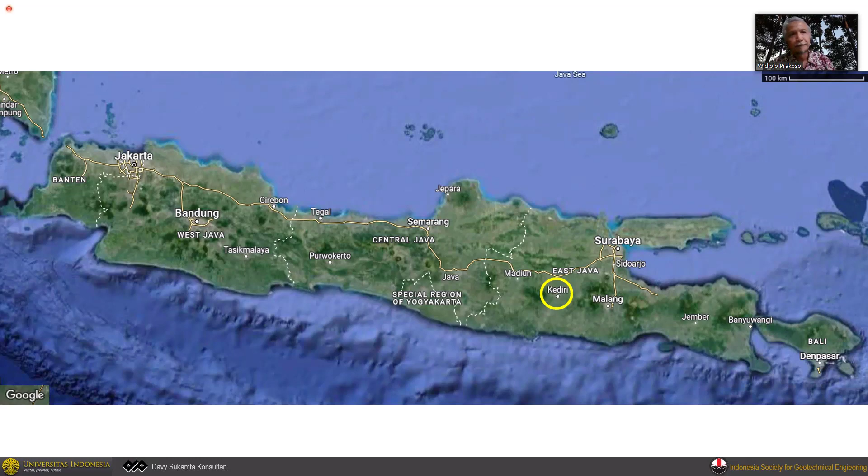On a more detailed map, the location in the yellow circle is northwest of the city of Kediri, on the foot of Mount Liman. Gunung Liman means Mount Liman, and you can imagine what kind of materials are available in that area due to the volcano. Mount Liman is a stratovolcano, and it is considered dormant. Hopefully nothing will happen during the lifetime of the project, so the investor is quite confident about the airport development in that area. When we saw this project for the first time, we knew it was going to be very challenging in terms of the geotechnical variability of the materials.

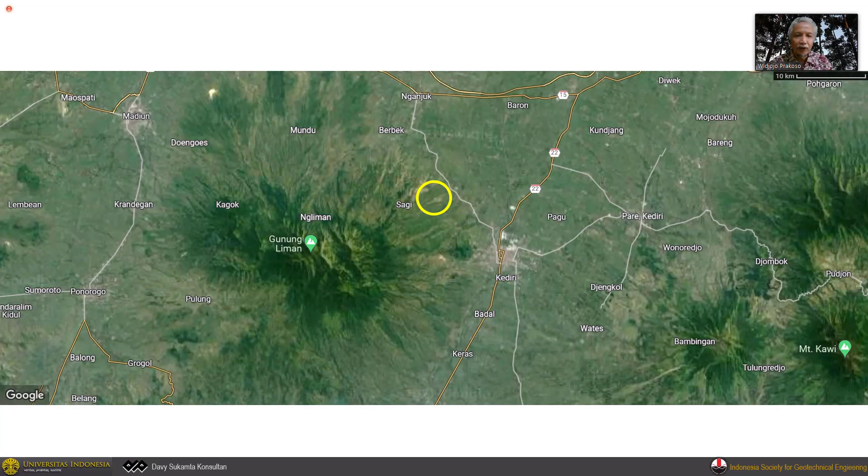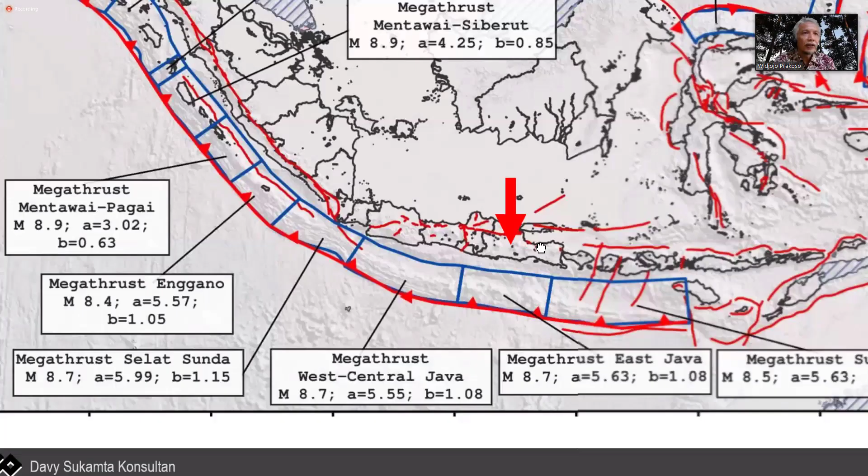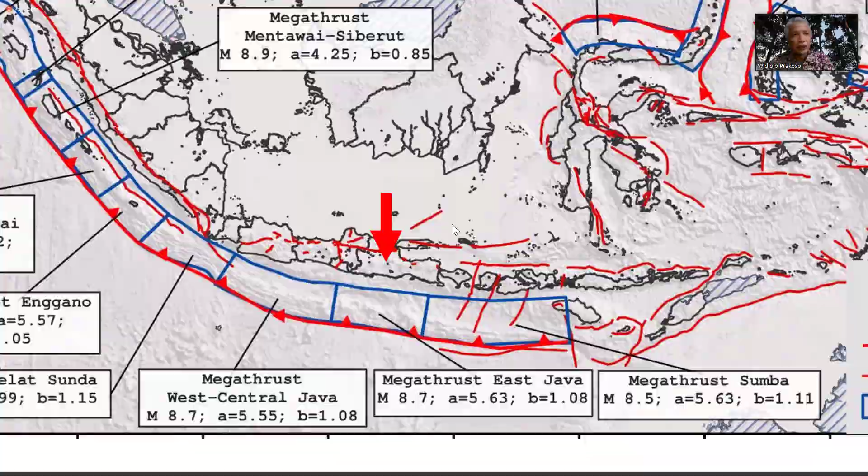Again, the airport is in Kediri; the red arrow shows the location of the project. It is in the southern part of Java Island, not too far from the so-called Java Sumatra megathrust, the major seismic source for Java Island, especially the southern part. So we have to design our airport to anticipate an earthquake from this megathrust. It is an active seismic source, so it is a matter of time before we have a major earthquake there.

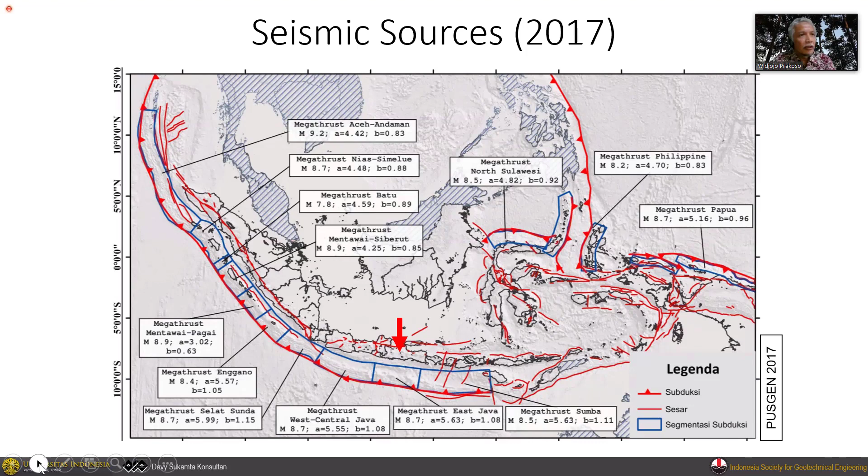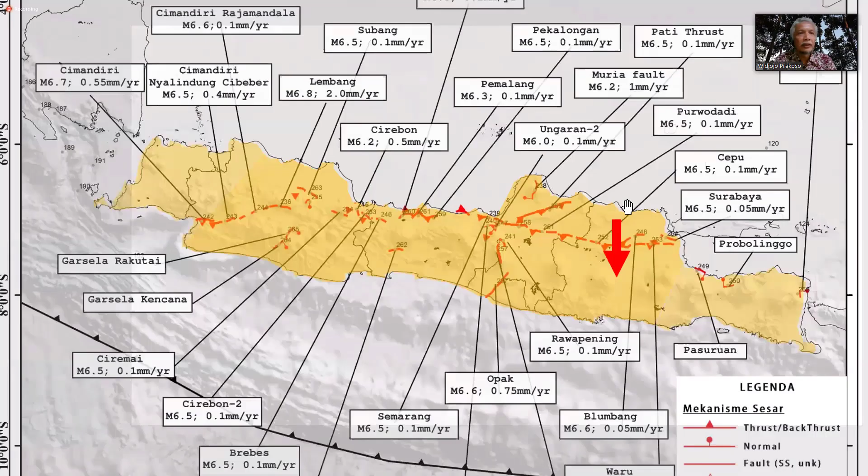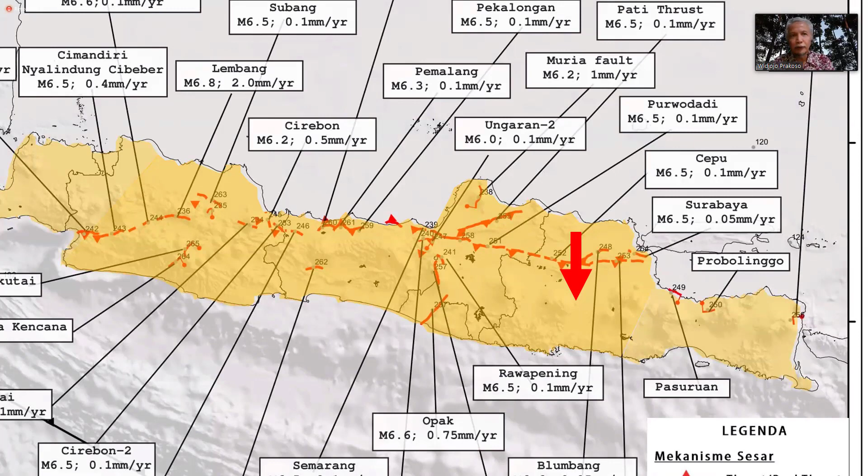We also have a more detailed seismic source map in Indonesia. The red arrow again is the project location. Fortunately we have no direct or near-fault conditions. The nearest fault is probably 50 to 60 kilometers to the north, so no direct interaction with active faults in the region. But overall, we need to consider all these seismic sources in the design.

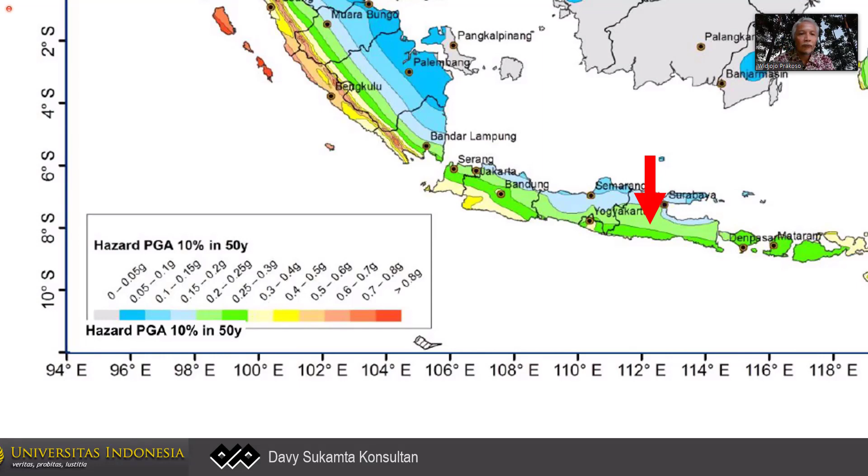Looking at the seismic peak ground acceleration map, our geotechnical codes require designing geotechnical structures to a PGA for 10% probability of exceedance in 50 years, about a 475-year return period, so we adopted this value. In this area the PGA at bedrock level is between 0.2 and 0.25 g, quite large for geotechnical structures, and that affected our design. This is the seismic background we needed to consider very carefully, to make sure the project will survive real major earthquakes in the future.

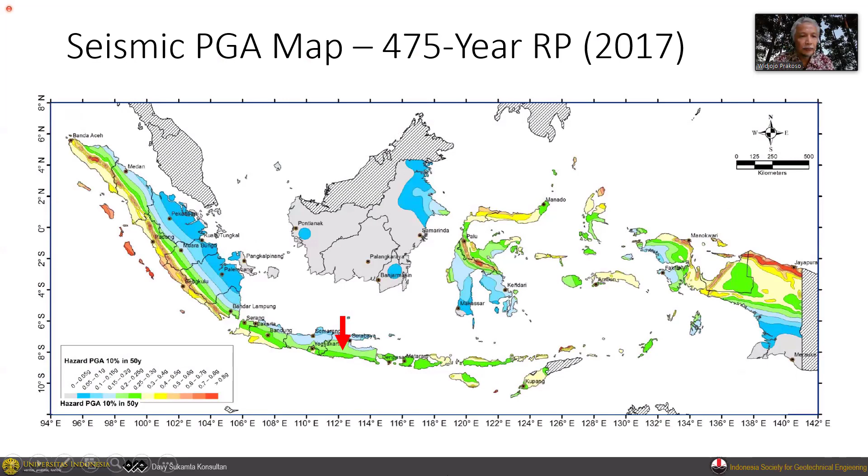And as it is located on the foot of Mount Liman, we also check the geological map, and there is a susceptibility to landslide map developed by the Agency for Geology. And if we look at this map, we found that fortunately it is not within the high susceptibility to landslide. It is in between the very low zone and the low zone. So hopefully, based on the experience of the Agency for Geology, we will not have any major landslide issues in the future.

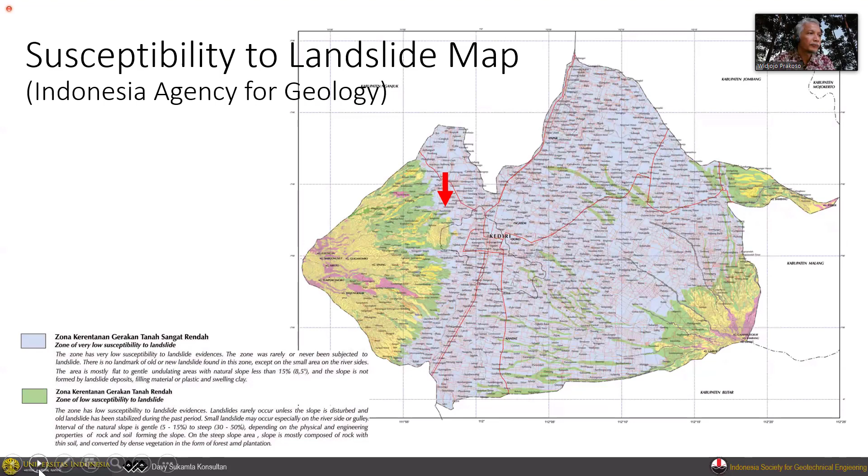So then we look at the topographical map very carefully, because you could see directly that the topography is very complex. If you could imagine, on the foot of a mountain there will be some fingering of the flowing materials, and this is what we are having in this project, a lot of fingerings that we need to take care of. And if you look at the values of the contour lines, you could see 100 to 125 or even 150 meter elevations within a very short distance.

And this really provided us with major challenges regarding how we could have a relatively flat infrastructure in this kind of terrain. So starting from the beginning, we paid a lot of attention to this terrain to make sure that we don't miss any major issues regarding this terrain. And this is another big challenge that we need to take care of.

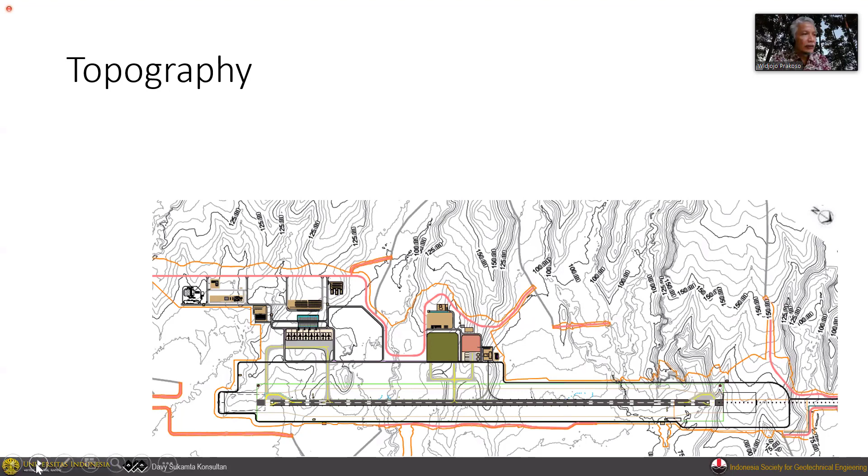So the Agency for River Management told us exactly what to do with this, and we cannot argue with them because that's their authority. So we had to follow their directions to make sure that these creeks are manageable in the future, although we are going to put a major infrastructure in this area.

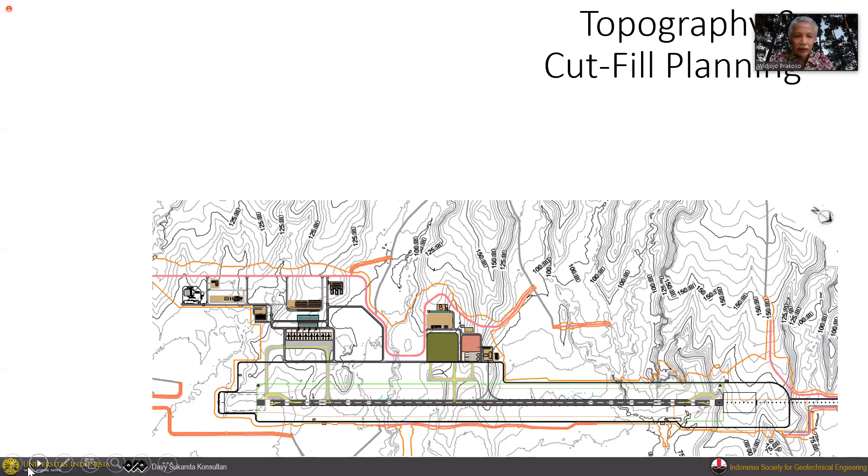So this is the depth of the cuts, and you could see that in some areas the cut depth could go up to about 20 meters. So you could imagine that we actually cut a hill to make sure that we could have relatively flat runways. And in some areas in the northern, the western part, the top part of this figure, we could go up about 15 meters along the western boundary. But those are for the surfaces area. Today's talk will focus on the runway only.

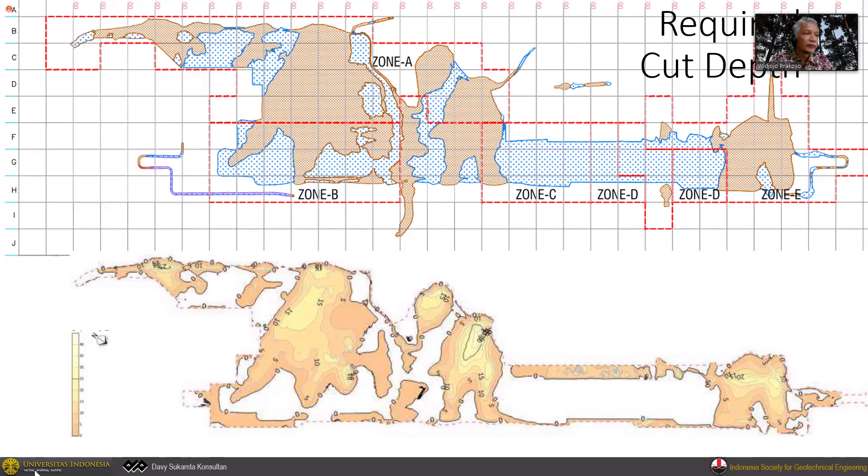So again, you could see that we will have some major cut area, and we also did some fill height analysis, and you could see again the areas are distributed along the runway. In the southern part, the fill area is not that high. Well, it's relatively high, about 8 to 10 meters high. But somewhere in the northern part, we could have up to about 30 meters fill area.

Again, this is a major challenge for us, because we have to deal with that due to the terrain of this area. And so we again need to do a very careful assessment of the effect of the terrain on the geotechnical requirements. So again, we could have a fill area up to about 30 meters high.

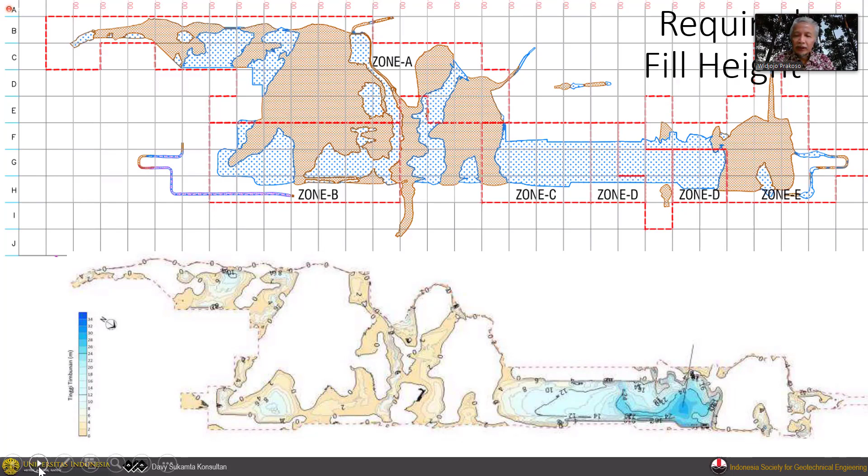And if we look at the material balance, we had to deal with almost 13 million cubic meters of cut materials, and we have to do about 11 million cubic meters of fill materials. So we can say that we have no imported geomaterials. Although there is a surplus of the cut materials, not all cut materials can be used as fill materials due to the fill materials requirements.

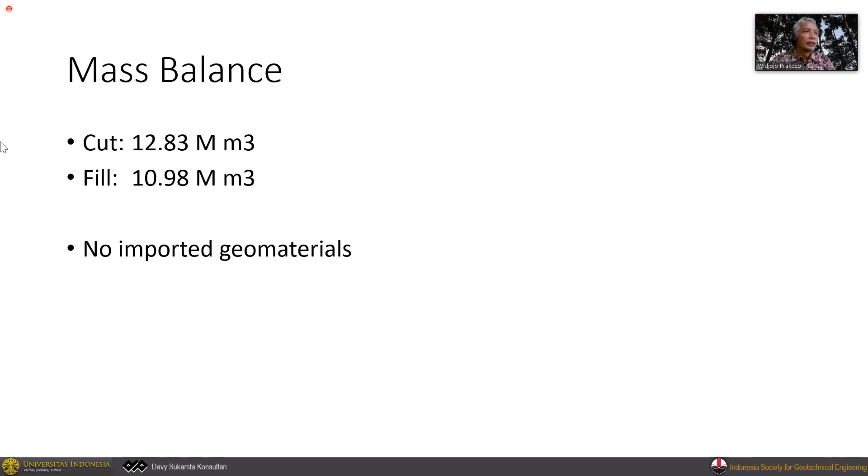We don't want to put just any cut materials into the system, so we have to do a very careful selection of the cut. So it was a major issue in the beginning, because we have to set some very strict material requirements that could be easily implemented in the field, because we have to deal with a large amount of cut materials, and we have to do a very careful selection of the fill materials. So it was a major discussion how to do material selections easily performed in the field. So these are the issues that we have to deal with.

And when we started doing this project, we got a set of soil investigation results. It was initially done in 2017, and the reports include more than 100 boreholes and SPTs, some piezometers, as well as some seismic downhole surveys. And when we plot the results, unfortunately, the previous soil investigation is not lined up well with the latest airport planning. You could see that the zone of the soil investigations is in this direction, but the latest planning of the runway is a different direction. So again, the soil investigation results don't match with the latest planning of the airport.

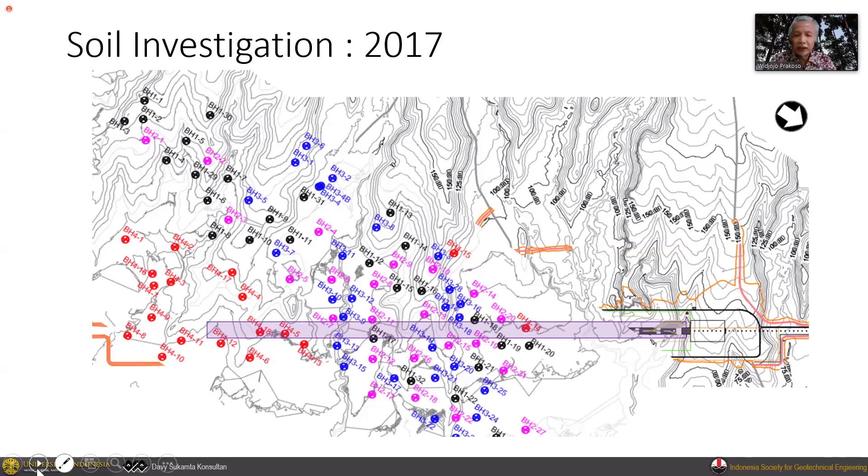But anyway, we can get ideas about the geotechnical conditions, and this is one of the early plots of the geotechnical conditions. You could see the terrain of the area goes up and down, and there are some gullies and hills that we have to take care of. And if we look at the material profiles, it's very complicated, and it is common in mountainous areas in Indonesia that we have this kind of geotechnical profile. Number 1 in circle is basically clay silt materials, the predominant geomaterials. Number 2 in circle is for sands, while number 3 in circle is rocks.

And the second number is the SPT values. Number one is for the very soft or very loose materials, number two is for the medium materials. So we could see that we do have some not really good clay materials, and we will need relatively high fill. So this gives us some idea what kind of project we are dealing with. So we need some major geotechnical investigations to provide us with much more detailed geotechnical conditions for this area.

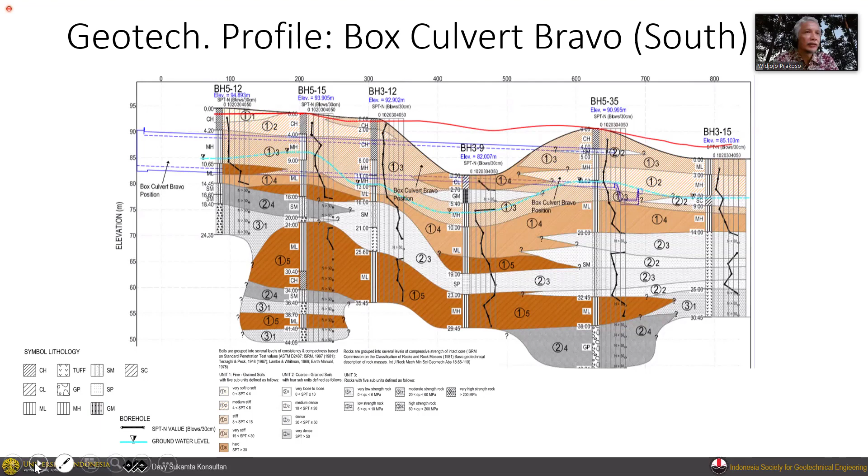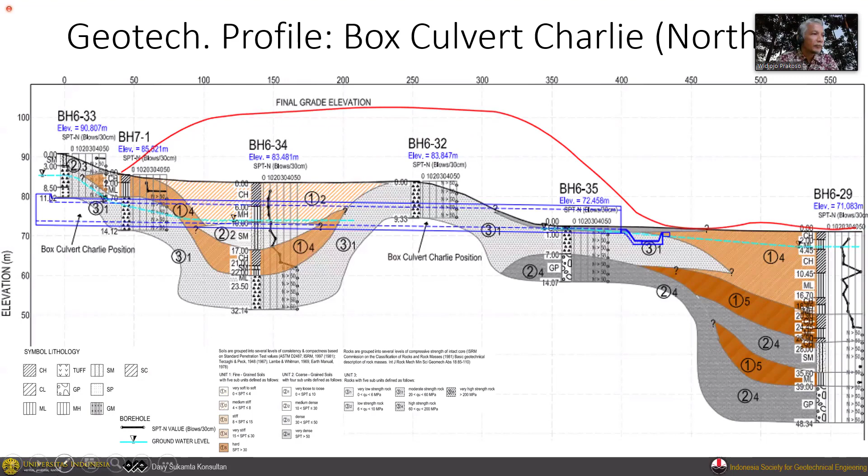This is another cross section across the runway, and again the red line is the proposed runway elevation, and we will need some major fill materials. You could see some gullies, and that the gully was filled with materials. This is quite common in this kind of area, although we also have some rock outcrops. So we have very high geotechnical variability that we need to deal with when we consider the geotechnical design for this project.

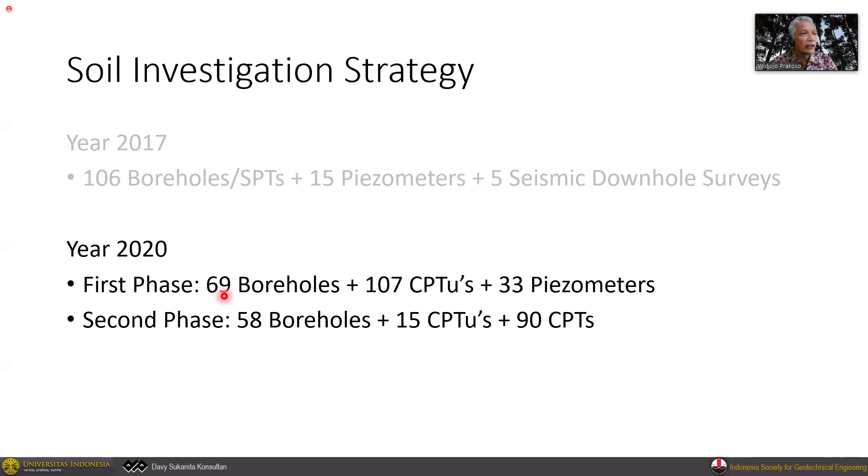So when we started doing this project, we proposed a lot of additional geotechnical data. About 120 boreholes were conducted in 2020, and about 200 CPTUs and CPTs, as well as some piezometers. So we want to do more geotechnical profiling to make sure that we don't miss something major in our design.

So when we proposed the 2020 soil investigations, we really carefully examined the proposed cut and fill planning, and most of the additional geotechnical investigations were conducted in the high fill area, because that would be the most critical area in this runway system. And as I mentioned to you, we also have a major box culvert to divert the creek. The box culvert will be underneath the high fill area, so we want to make sure that the box culvert would perform as designed. We don't want to have major uncertainties in the box culvert design, so we did a lot of soil investigations in this area.

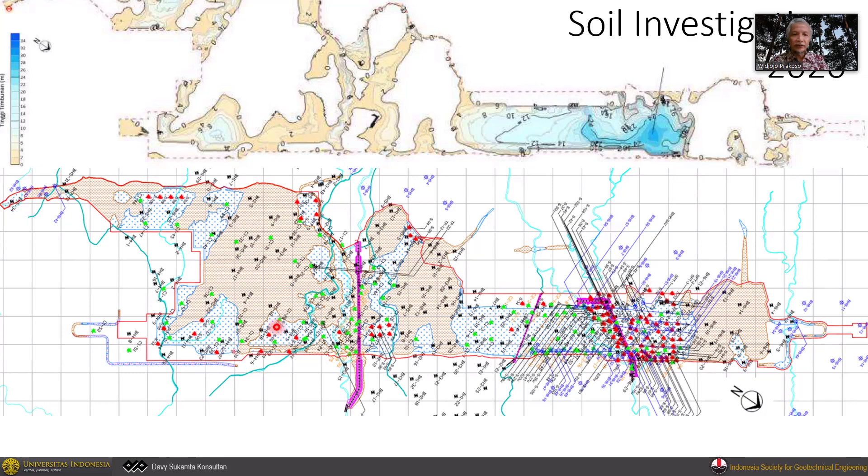So this 2020 soil investigation was really designed to accommodate the high variability of the geomaterials observed in the 2017 soil investigation results. And we have combined those with the proposed airport configurations. So when we face this kind of challenge, we need to put our focus where it is really necessary. This is to address the challenges that we talked about earlier. I should have clicked this before, but you could see that the locations of the soil investigations are correlated to the high fill area.

So based on the additional data, we did some seismic site class analysis, and we have a very high variability of the geomaterials. But at the end, we decided that we don't want to be too optimistic about the seismic class because of this geotechnical variability. So we decided to stick with site class E or D, if you are familiar with the ASCE or NEHRP site class classifications, and in Indonesia we adopted those classifications. So basically, we just used class E and D for the seismic design. Although we know that in some areas there are rock outcrops that could be much better conditions, due to the variability, we don't want to be too optimistic about the performance of the system.

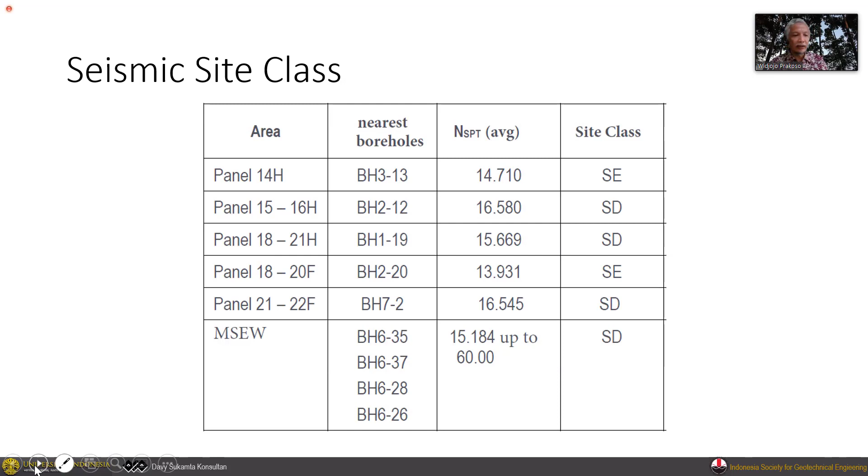So about the runway and ground improvement, the major design criteria are the settlement, including the maximum differential settlement, as well as the post-construction settlement. We adopted the criteria defined by ICAO as well as by the Ministry of Transportation of Indonesia. So basically, the maximum differential settlement is 30 mm in 45 meters, or about a 1 to 1500 ratio, while the maximum post-construction settlement in 1 year is 20 mm, and in 10 years should be less than 100 mm.

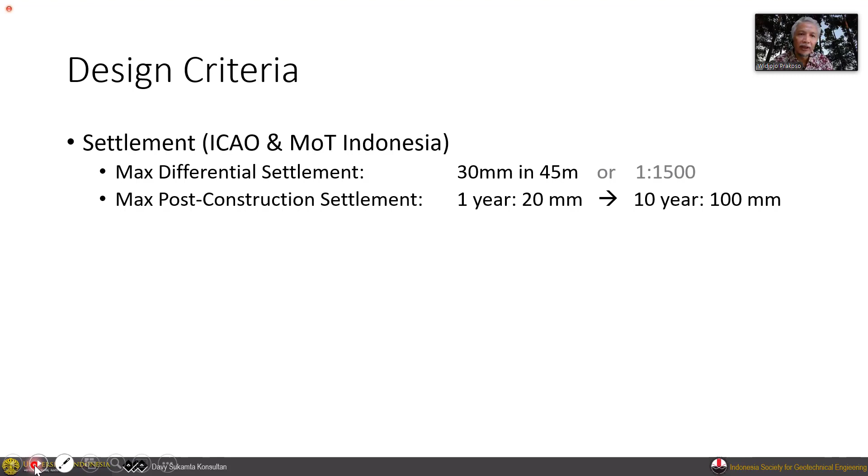As we have predominantly clay material, this is something that we need to consider very carefully, because we don't want our runways to have excessive settlement. And given that the fill materials vary significantly, and we also have some cut areas, we really want to make sure that the settlement will not vary significantly along the runway. That would create long-term problems for us, so these settlement issues are major issues that we need to consider.

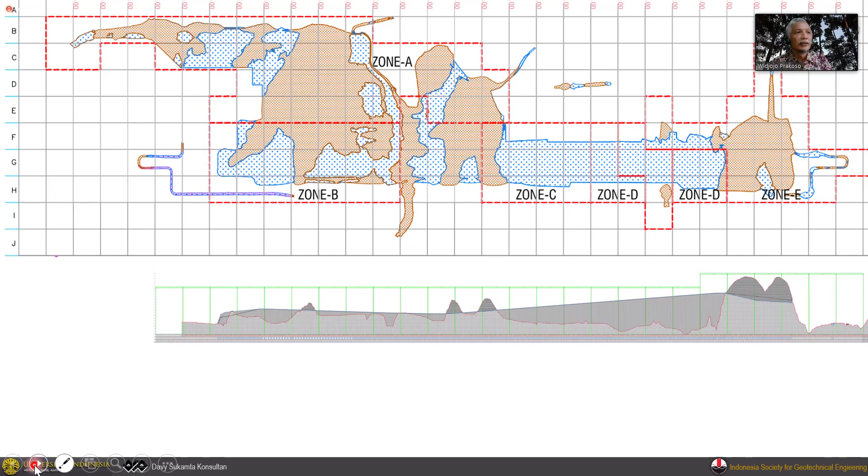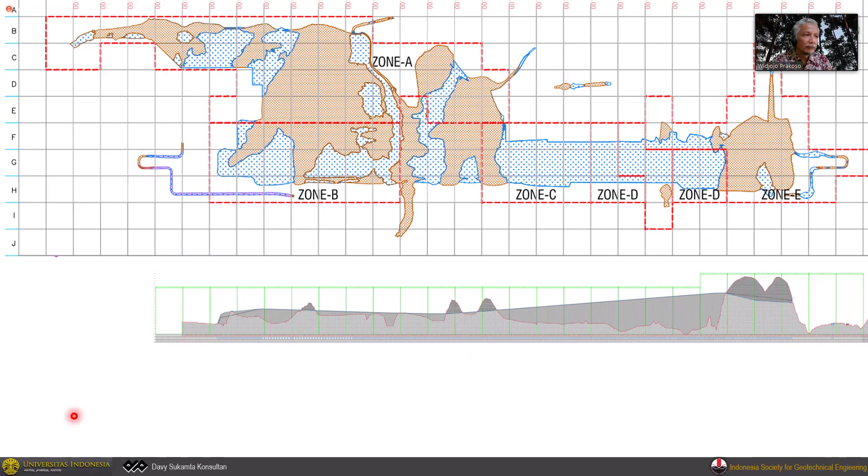So we can come back to this cut and fill zoning. The lower figure is the cross section along the runway. You could see that in zone D, we will have a major fill area, while in the southern part, on the left side, we have like an 8 to 10 meter fill area. So we have a significant terrain problem in this project.

As I mentioned to you, this is a public-private partnership project. So we have to deal with the private sector as well as the government, and both sides highlight that it should be very cost-effective. So we really did major studies on how we could make sure that the performance of the runway is within the design criteria, but the cost will be very cost-effective.

So we came up with the scheme that, of course, we have to deal with the settlement issue along the runway. Again, we have very varied geotechnical conditions for the runway. So we need to do a very detailed analysis to make sure that the predicted settlement will be within the design criteria set by the government as well as by ICAO.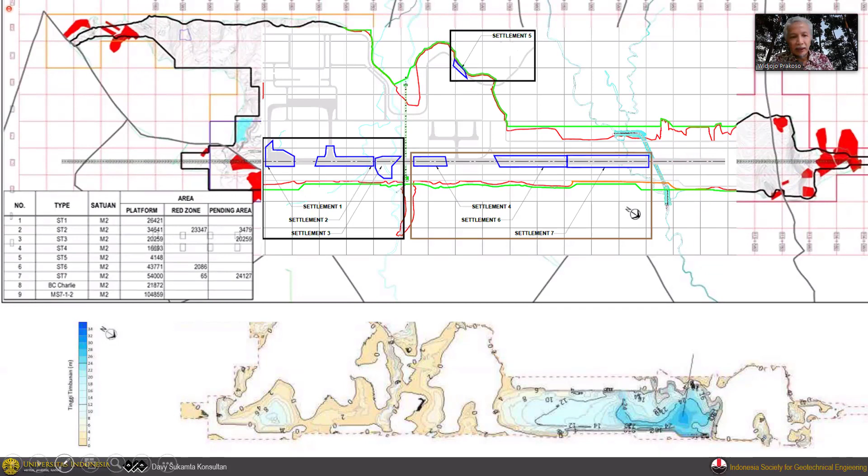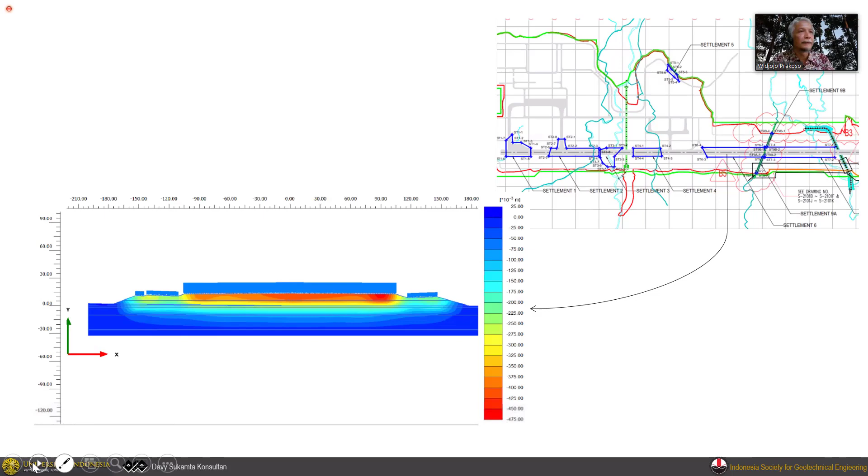So we did very detailed analysis for each panel to make sure that everything is within the design criteria. So we came up with this. I'm sorry, it's still in Bahasa Indonesia. Based on our earlier data, we could make a settlement profile of the runway. And we found that we're still okay in terms of the maximum differential settlements, but we still have problems with the post-construction settlement.

So that's the reason why we introduced the ground improvement schemes for this runway, again, due to the maximum post-construction settlement that we need to take care of to make sure that the performance of the runway will be okay. And if you look at this figure, in the darker blue area, you could see that the rock is not that deep. So we don't have rather thick original materials to deal with. That's why we can just use the construction period to make sure that we will have no major settlement issues in the long run.

But in the middle part of this area, we do have rather thick clay silt materials, up to about 20 meters deep. So this is where we need to consider the settlement problems very carefully. That's the reason why the ground improvement scheme is focused on this area, because we have a combination of relatively thick fill and relatively thick natural clay silt material. So this is where we need to consider our ground improvement. Again, this is in the context that we have to address the construction costs very carefully as well.

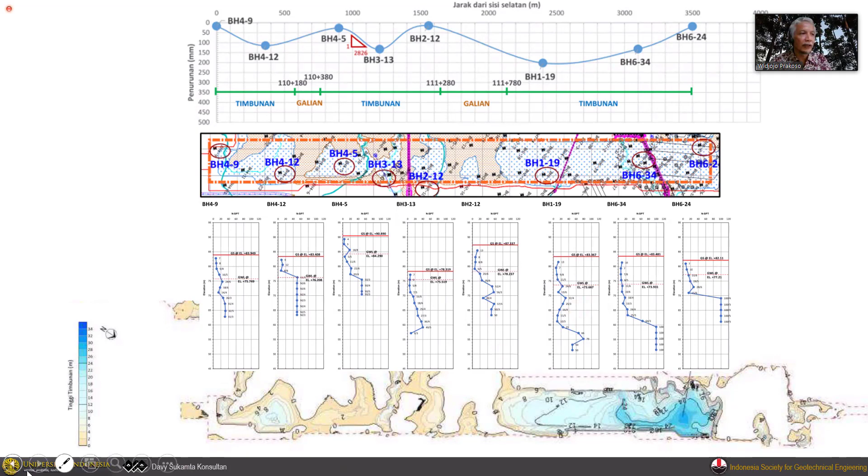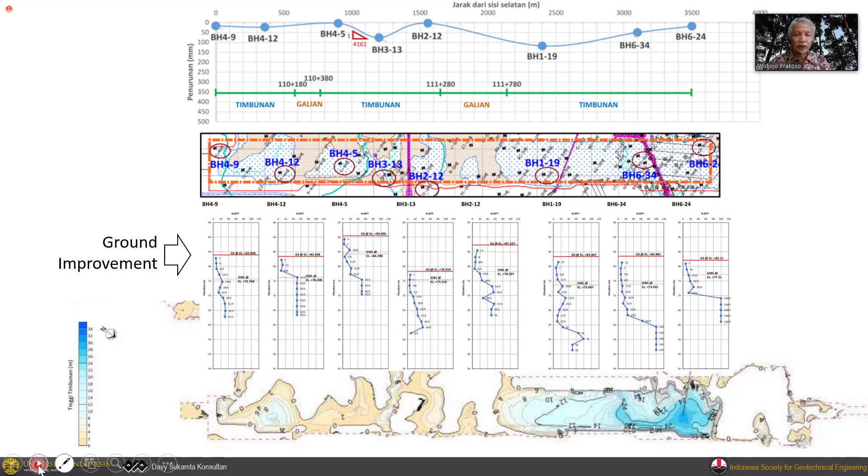And then we introduced the ground improvement in some parts, not all parts of the runway. So we came up with a reasonable number so that we could fulfill the design criteria of the maximum post-construction settlement. So this is basically the scheme of ground improvements. We introduced two different ground improvement techniques. First is the typical stone columns, the dry bottom feed stone columns, and the other one is the deep dynamic compaction.

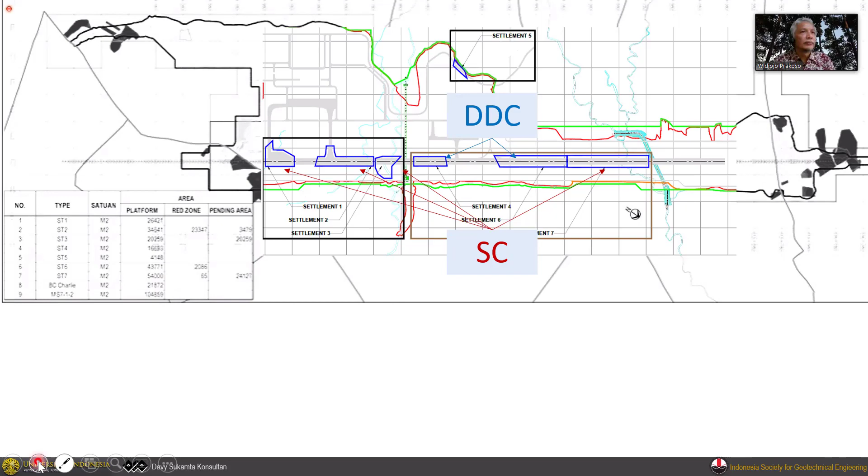The DDC method is actually quite new in Indonesia. So the contractor proposed this to the owner, and they accepted that they could use this DDC. So we actually have two different methods to improve the soil. That is one of the additional requirements from the owner. Then we did some trial tests to make sure that everything will be within our target range of geomaterials. So this is for the runway.

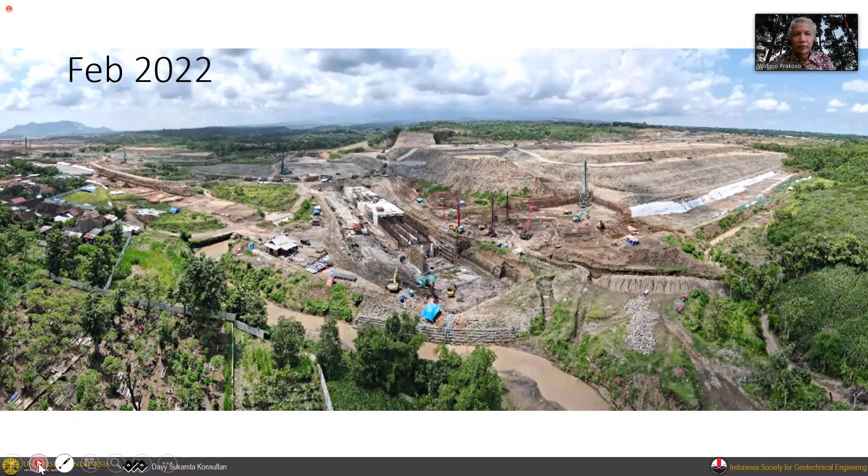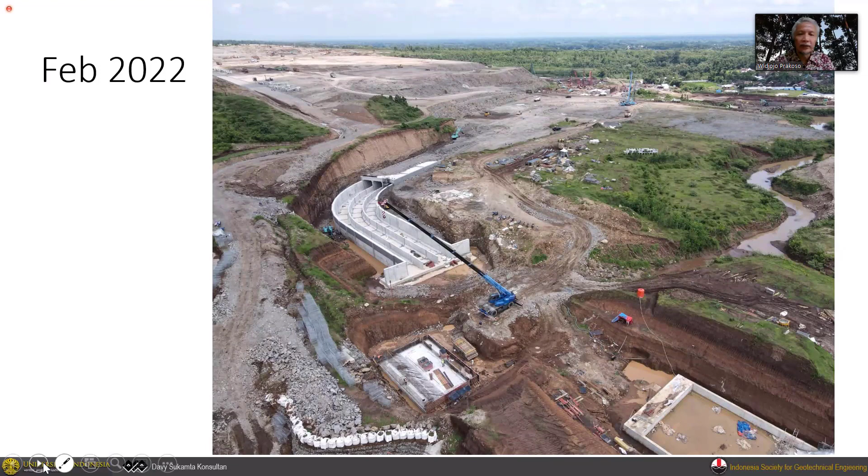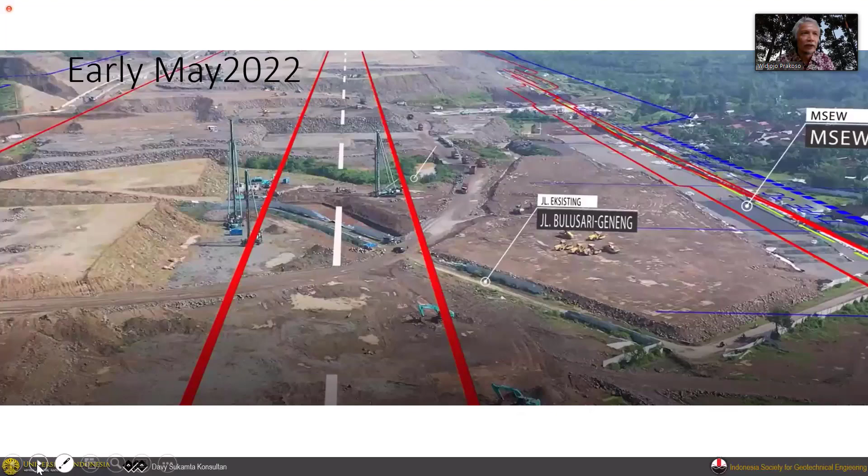So this is the latest picture that we get from the field, and you could see how this construction progress is still ongoing right now. And again, if you look at this, the heavy equipment looks like toys because of the size of the embankment, the fill for the runway itself.

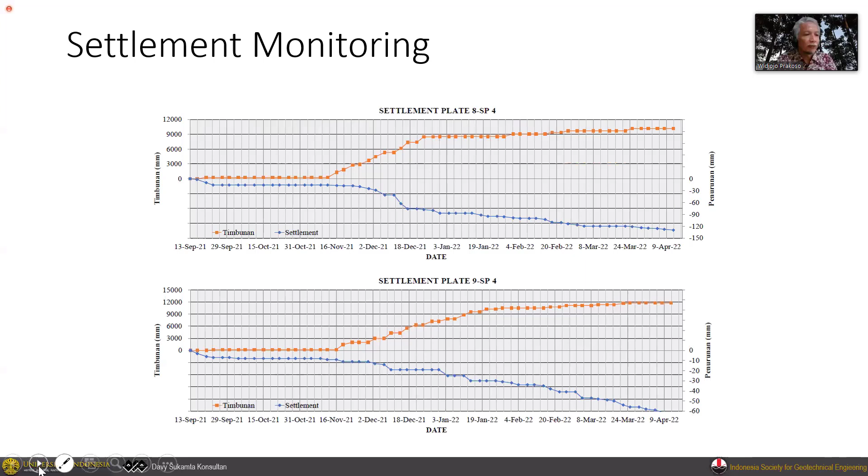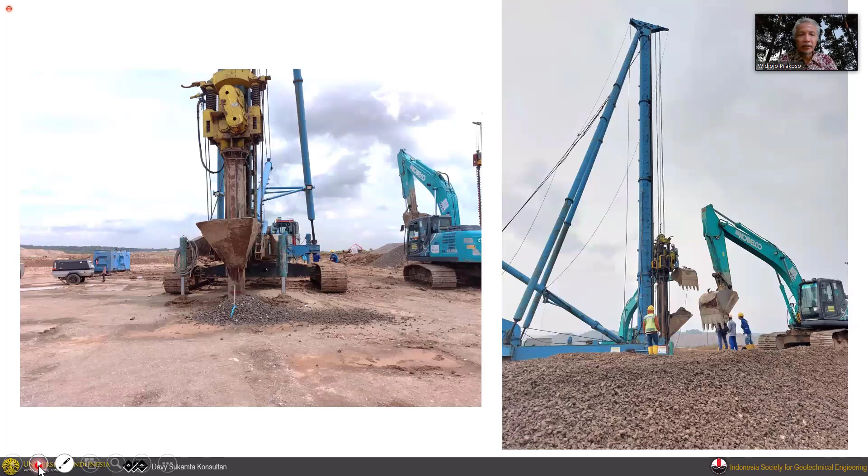Because although it is in a mountainous area, we still need to be very careful about the long-term settlement to make sure that our geotechnical structure will perform accordingly. So to make sure that the ground improvement techniques are proper, we did some trial tests. And for the stone columns, this is just a typical stone columns ground improvement.

And as I mentioned to you, we have to use cut materials. And as the materials themselves vary from natural sands up to rock pieces that we have to crush, we have to use different materials. So we did some very thorough grading requirements to make sure that although the parent materials vary significantly, we still have good materials for the stone columns.

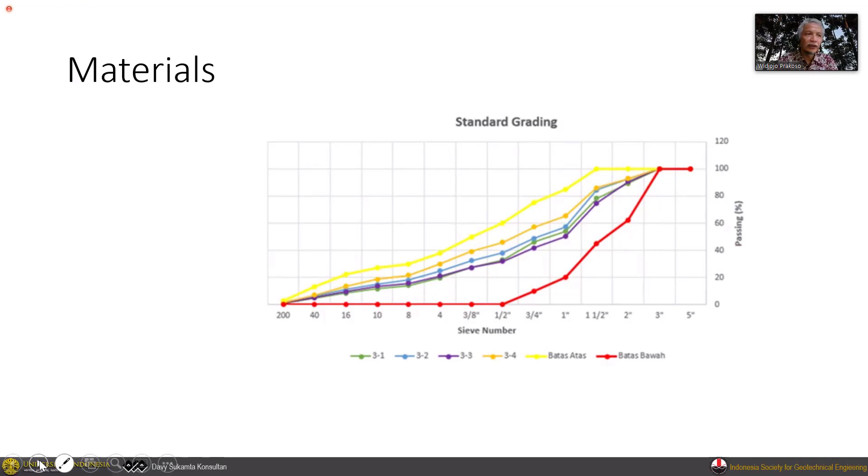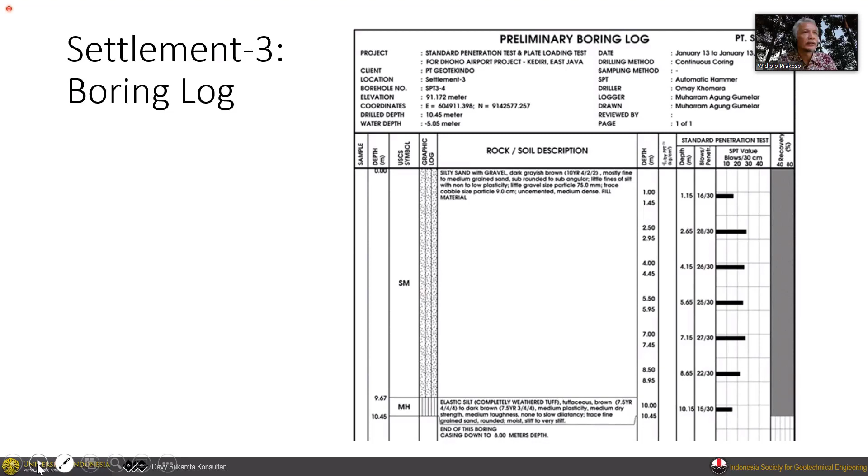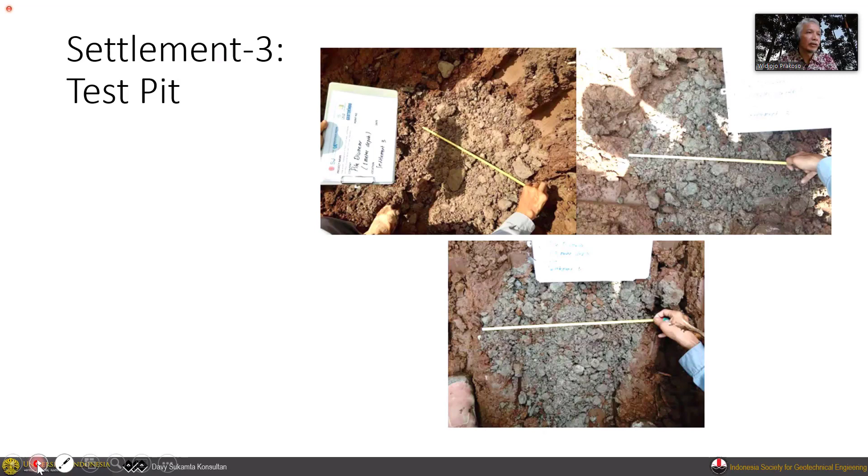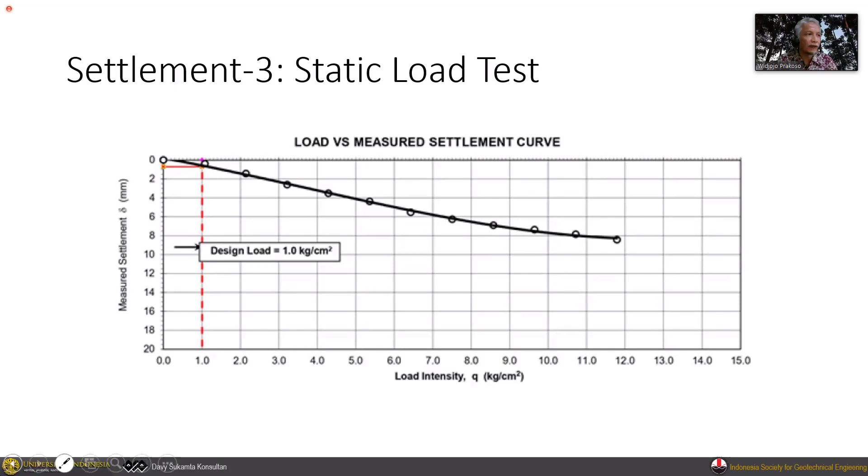So in the trial phase, after they installed one of the stone columns, they did some borings to make sure that they get good materials, and you could see that the SPT values varied, and they are in a good range of density. They also did some test pits to make sure that the diameter of the stone column is within the acceptable limit. And they did some static load tests as well, to make sure that the assumed modulus for our analysis, the minimum modulus, is achieved in the field. This is one of the static load tests conducted.

And what I want to say is that when they did back analysis, we could see that the soil elastic modulus varied significantly. The source could be the materials of the stone column itself, because the parent materials vary, and we also have natural materials variability. So this could be due to both variations, and that's why we get this very high variability of soil modulus obtained from the back analysis of the load test.

So again, when we do this kind of project, we have to be very careful not to be too optimistic, because we need to consider the high degree of variability of the natural materials as well as the fill materials used, because the parent materials vary as well. So for us it's a good lesson; we were glad that we were not too optimistic, honestly. And this proved that we have to be very careful to select the modulus because of this high degree of variability of geomaterials.

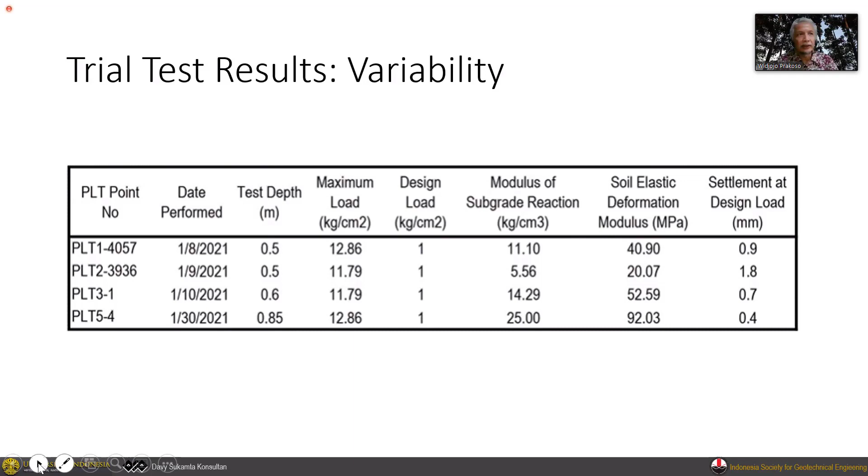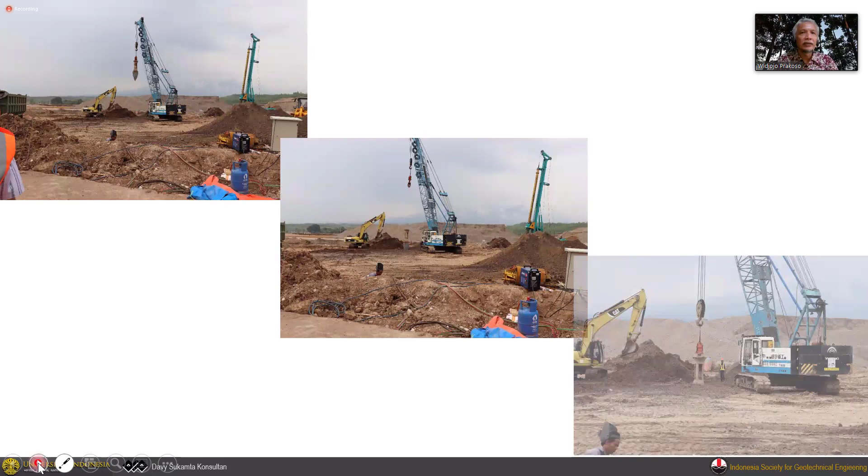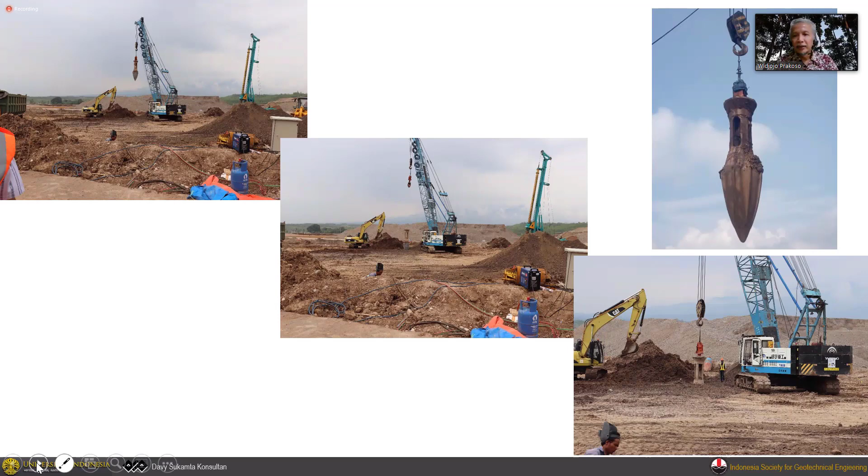And we also did some trial tests for the DDC. If you are not familiar with DDC, basically it is like a torpedo-like rammer, a ram hammer. It is just dropped like typical dynamic compaction, but the shape of the rammer is like a bullet. So again, we have to use different types of materials, so we also use different sources of materials. One is based on surface miner equipment. The other one is just based on rock excavation.

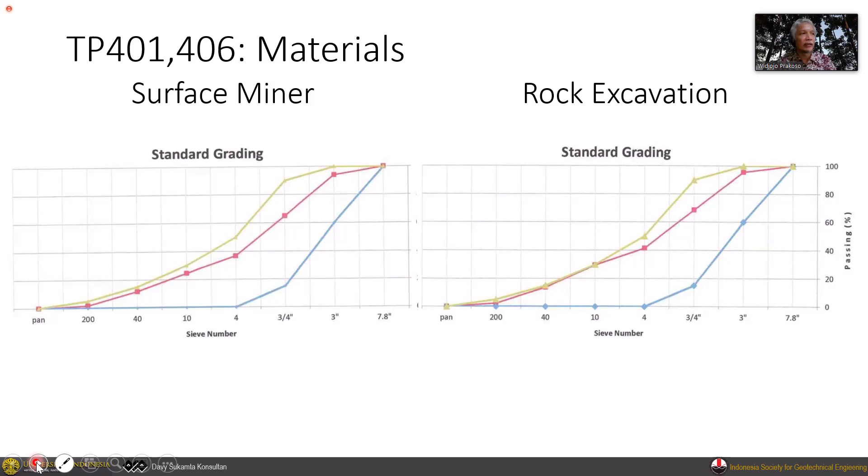So we use a variety of materials to make sure that we have a good understanding of the behavior of these ground improvement techniques. They did some indicative sizes, and we could see that the variability of this trial product is quite significant. The end product varied, not really significantly, but quite varied. So we need to consider this as well in our evaluation. And they also did some test pits to make sure that the indicative diameter is also true.

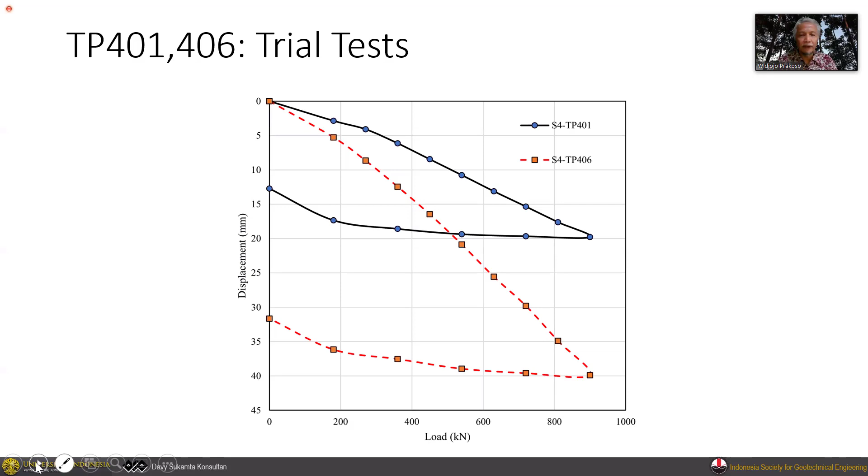They did some static load tests for this DDC, and these are two tests very close to each other. And again, we have variability in the parent matrix of the fill materials, as well as the original ground conditions. So we get rather different results, although they are very close to each other. And again, the variability of the original conditions would translate into the performance of this kind of ground improvement as well. They did 7 tests in different parts, and you could see the variability of the load test results.

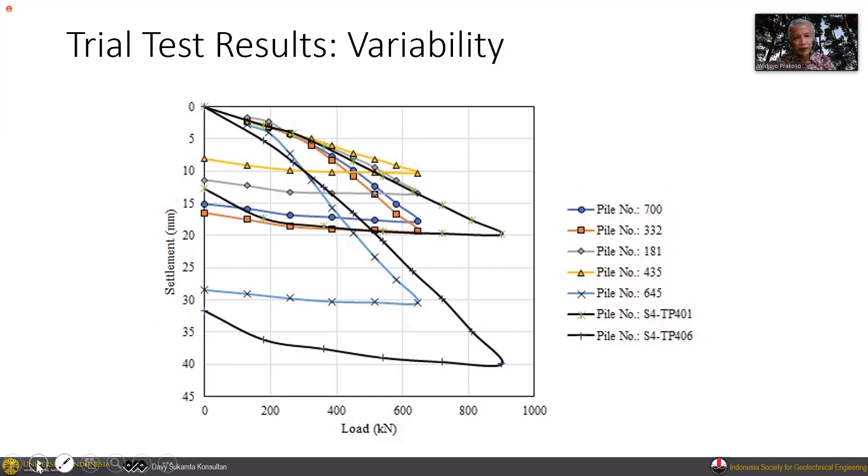Again, if we have this kind of project in the future, we need to do a careful assessment of what kind of performance we could expect in the field. We need to consider the natural variability of the geomaterials, as well as the natural variability of the fill materials, the compacted materials, due to the variability of the parent materials.

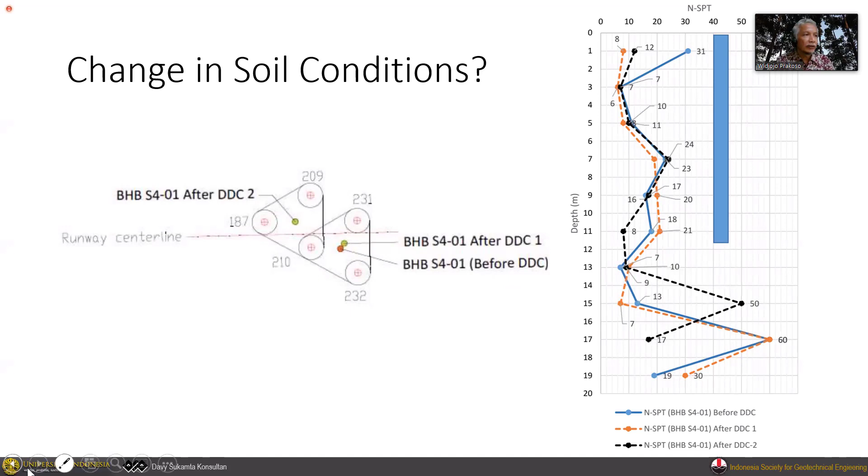They also did some borings and SPTs to check whether the DDC would affect the soil in between the DDCs. What we found is that, probably due to the initial conditions not being that bad, the increase in SPT values is not that significant due to the compaction of the DDC. So basically, when we design, we should not expect that the soil in between the ground improvement would be affected significantly by the ground improvement for this kind of material. This is also something that we confirmed in the field.

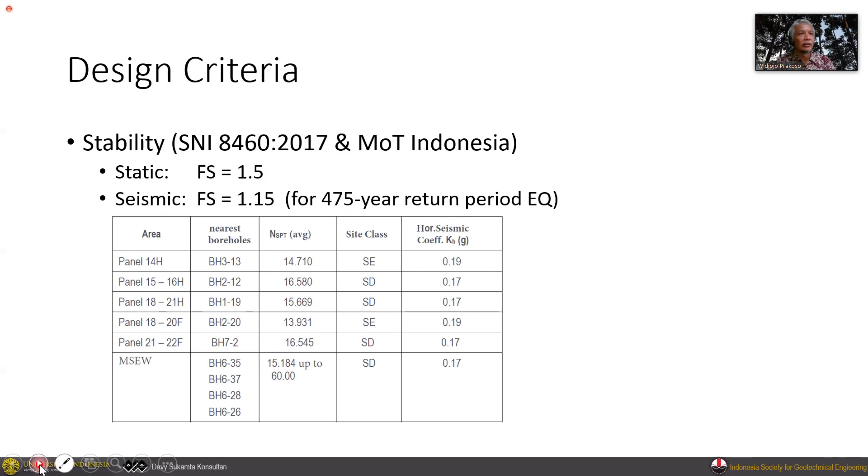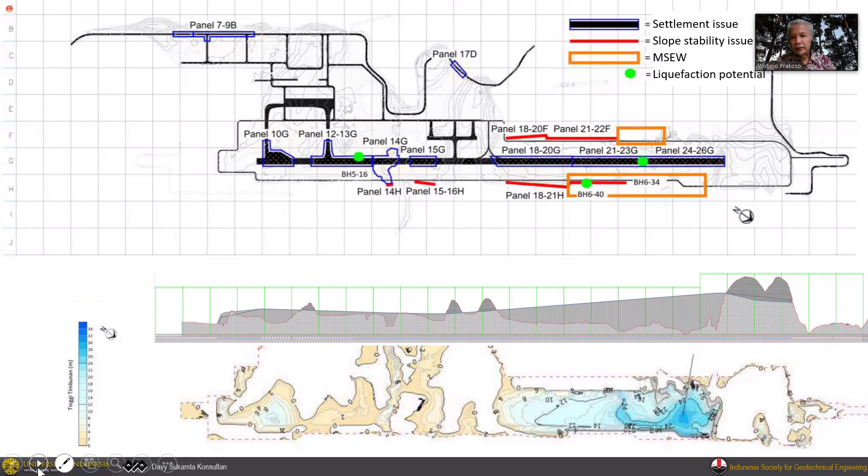For the MSEW, the most controlling design criterion is the seismic one. This is very important for us, because we will have a very high MSE wall, up to about 26 meters. As I mentioned, it's a matter of time before we have a major earthquake in the southern part of Java, so we have to make sure that our MSE wall would perform well in any major earthquake event.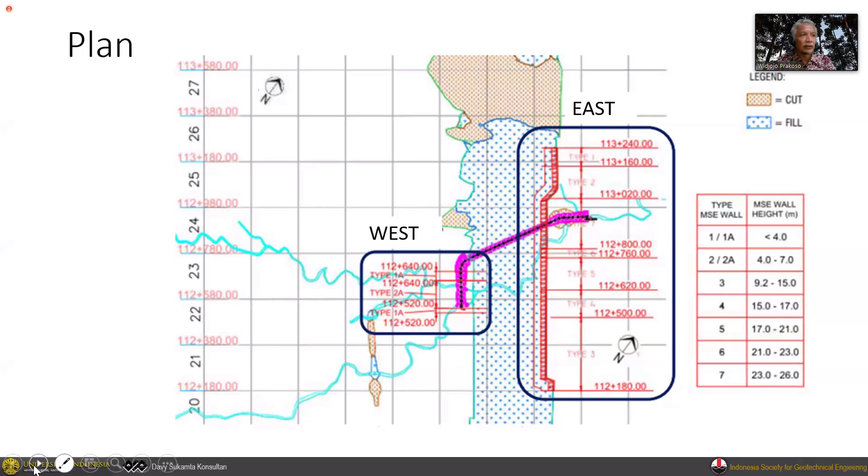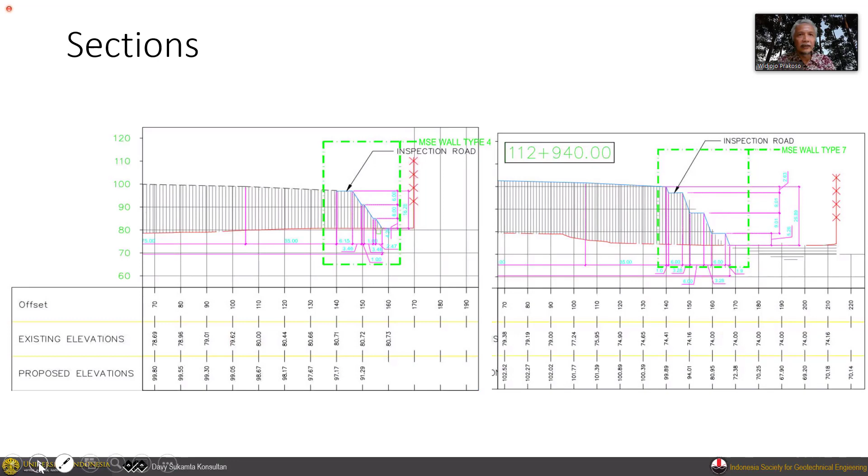So we really pay attention to this zone because of the conditions, and you could see there is a creek. This is one of the major box culverts in the area. The reason we introduced the MSE wall is that it is very close to the land boundary, so we cannot extend it to the natural slope option. And again, we have a terrain issue. You could see that the red lines are the contours.

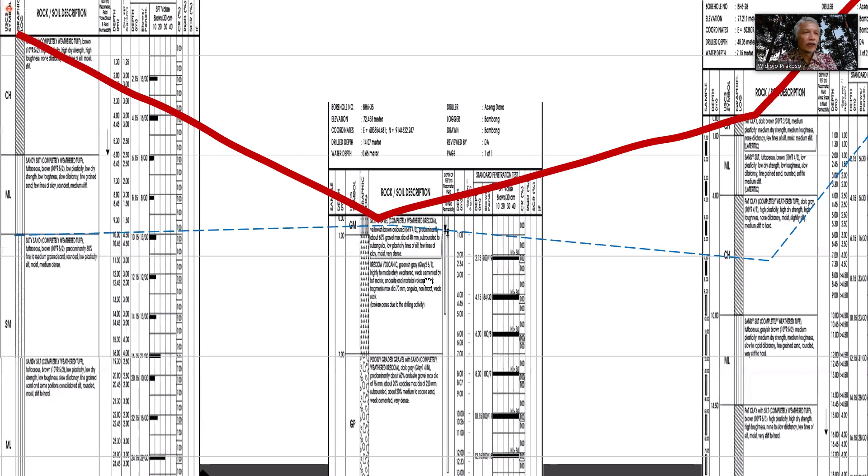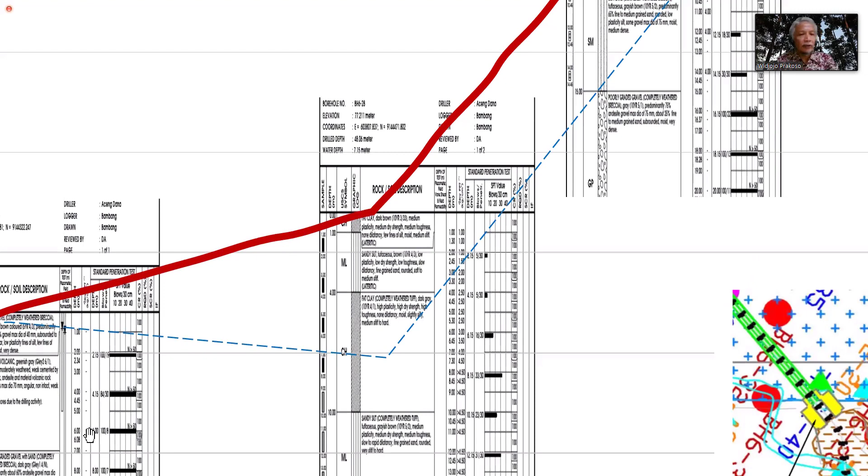Along the MSE wall, we are going to have a very steep change in terrain as well as in the materials. If you look at the middle one, we could have a relatively shallow bedrock, but next to that, we're going to have relatively different materials. So not only the terrain, we need to consider the high variability of the natural materials in this area. After very long discussions, we studied many different options of ground improvement for this MSE wall.

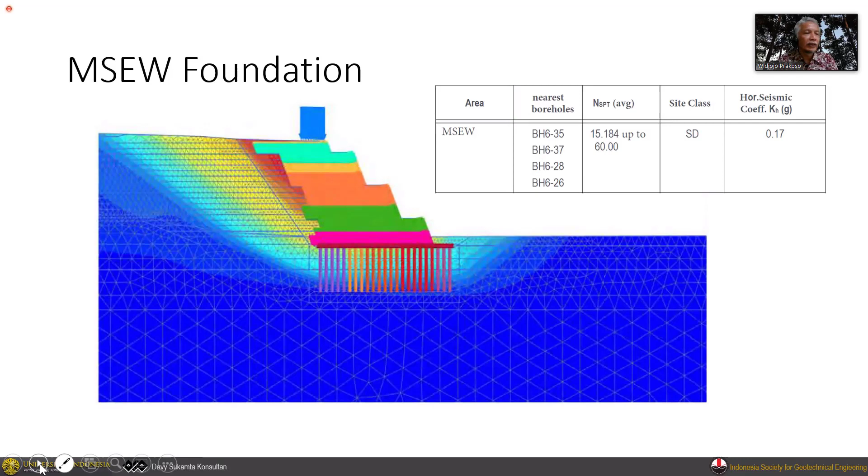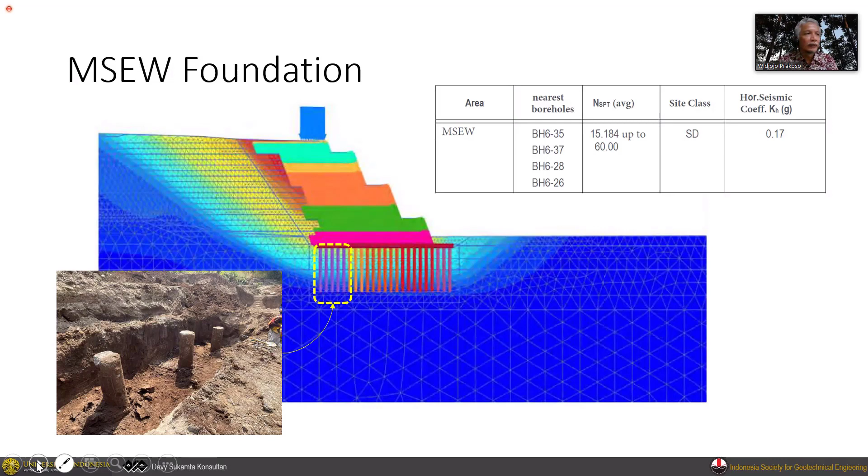We finally had to use some combinations of bored piles, because the ground improvement itself cannot withstand the seismic force. But to optimize the cost, we combined the bored piles with some rigid inclusions to make sure that overall we are still in a cost-effective zone. This is one of the pictures during construction, and you could see it's a massive foundation for the MSE wall.

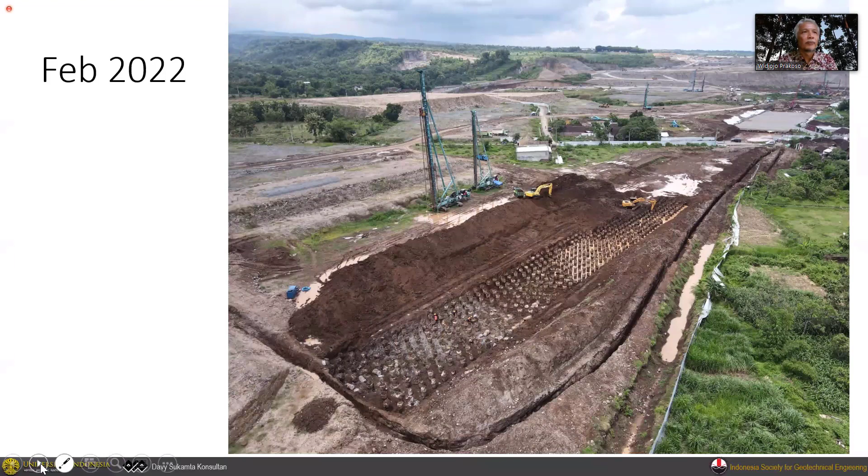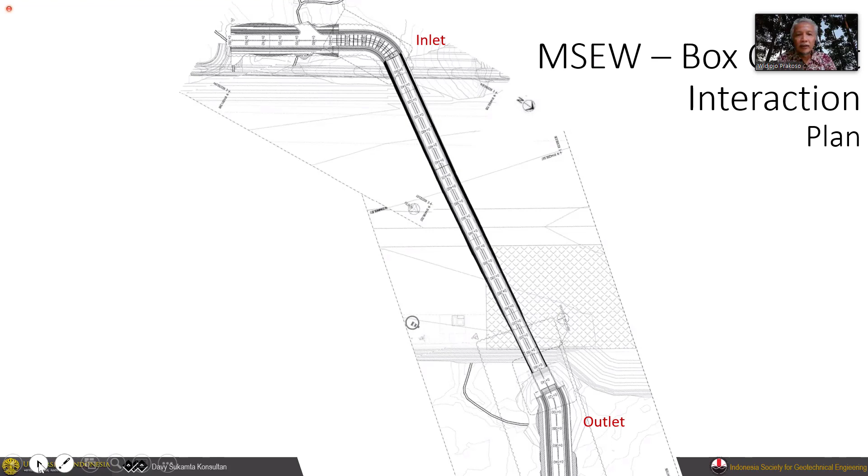But then we still had a problem, because there is an interaction between the MSE wall and one of the box culverts, and the box culvert is oblique relative to the MSE wall. We tried to persuade them to have an orthogonal box culvert, but it got rejected, so we had to deal with this oblique direction. The problem is that with an oblique arrangement, we get twisting behavior of the box culvert, which we don't want. So we needed to make sure there will be no twisting of the box culvert due to the non-orthogonal arrangement.

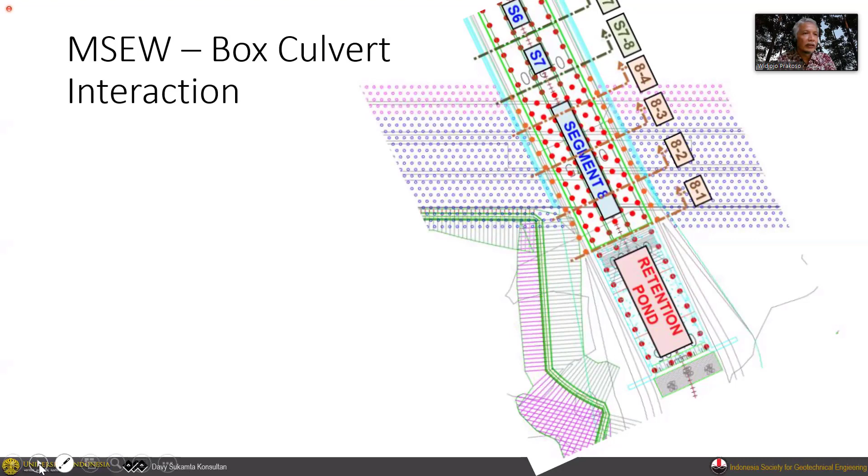Unfortunately, we also have relatively soft materials in that zone. So again, we needed combinations of bored piles and rigid inclusions in this area to make sure that the MSE wall is stable and that the box culvert is not twisted. It was a major challenge for us to analyze this kind of interaction, and we had to do full 3D analysis to make sure that everything is covered. We don't want to have major issues during the lifetime of this project.

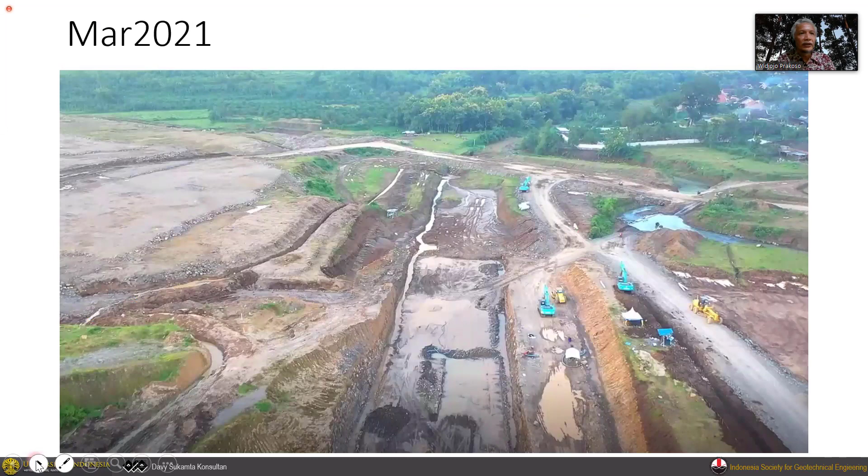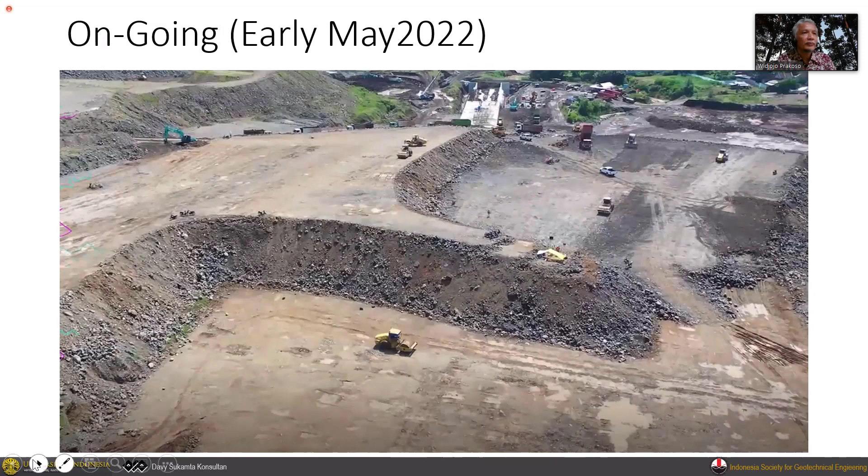This is the picture of this area. You could see this is the outlet of the major box culvert, and again the heavy equipment looks like toys in this area, and you could see the oblique direction of the box culvert relative to the MSE wall.

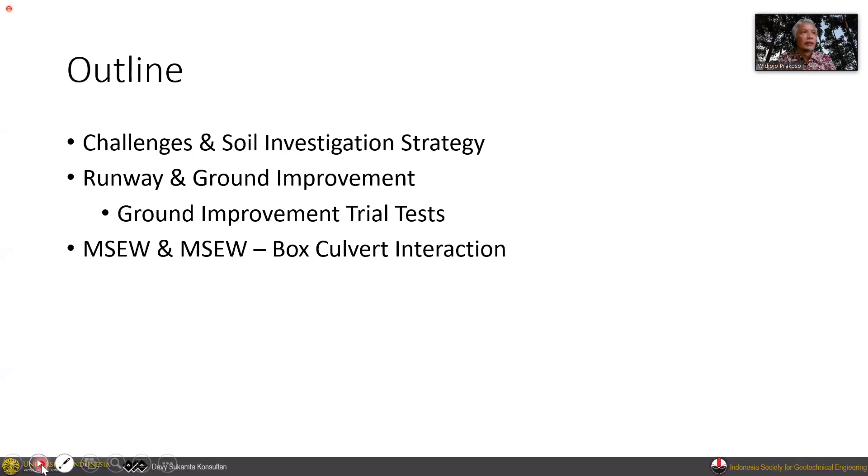I think that concludes my presentation. Hopefully this presentation could give you some lessons that we have learned from this project.